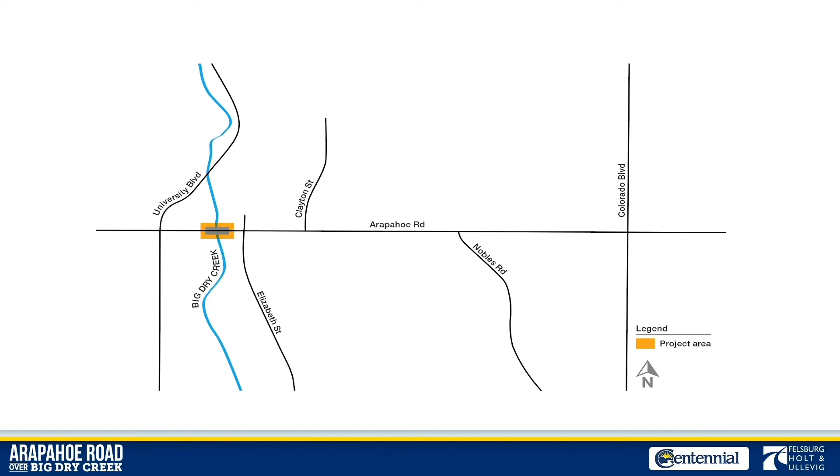This well-used bridge was built in 1945 and is located on Arapahoe Road, just east of University and west of South Elizabeth Street, and serves as a main east-west corridor to and from I-25 for the surrounding neighborhoods and businesses. The multi-use trail underneath the bridge provides access along Big Dry Creek to existing parks and other trails.

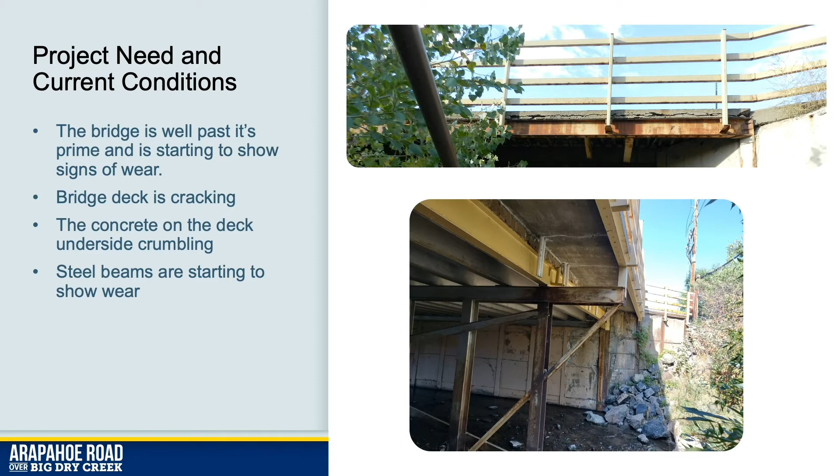This 74-year-old bridge is well past its prime and is starting to show signs of wear. As the bridge continues to age, maintenance costs will rise. Currently, the bridge deck, or the riding surface of the deck, has cracking and patched potholes, while the underside of the bridge deck is experiencing concrete spalling on the widened areas. The supporting steel beams are starting to show wear with the rusting of the steel.

Although the bridge was widened on both sides from its original design, it is still only 79 feet wide from outside to outside of each railing. Arapahoe Road is wider than this and is required to narrow down as it approaches the bridge from both directions.

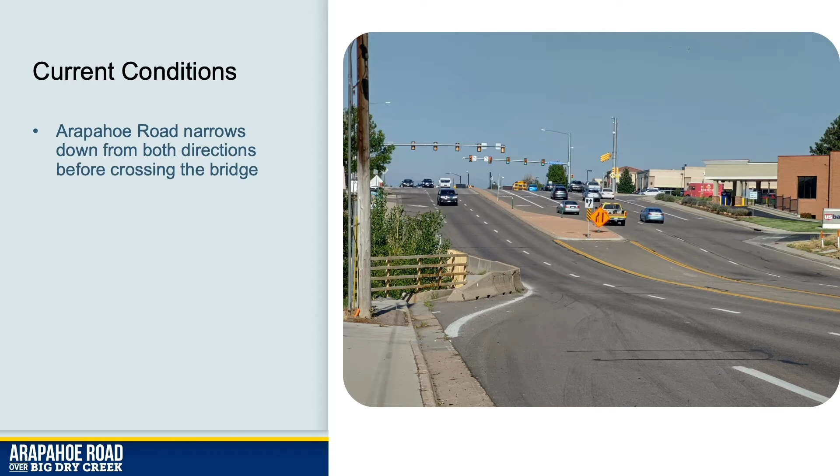As a result of the road narrowing, there are also inadequate pedestrian facilities on the bridge. This includes a sidewalk that no longer meets current needs and a set of stairs that serves as the only connection to the Big Dry Creek Trail.

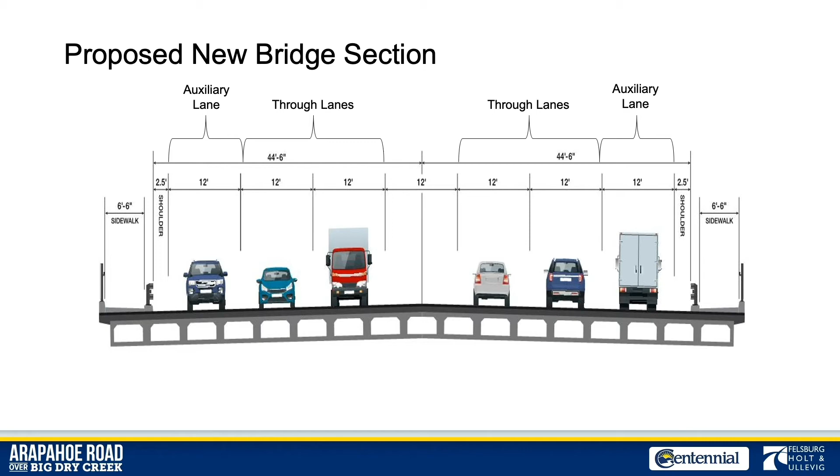The proposed new bridge will be 107 feet wide, and the design will be able to accommodate two 6.5 feet wide sidewalks, 2 through lanes in each direction, and a center turn lane. Currently, there is an existing raised median. The raised median will be shortened to allow for earlier access to the dual left-hand turn lanes for cars traveling westbound and turning south on University Boulevard.

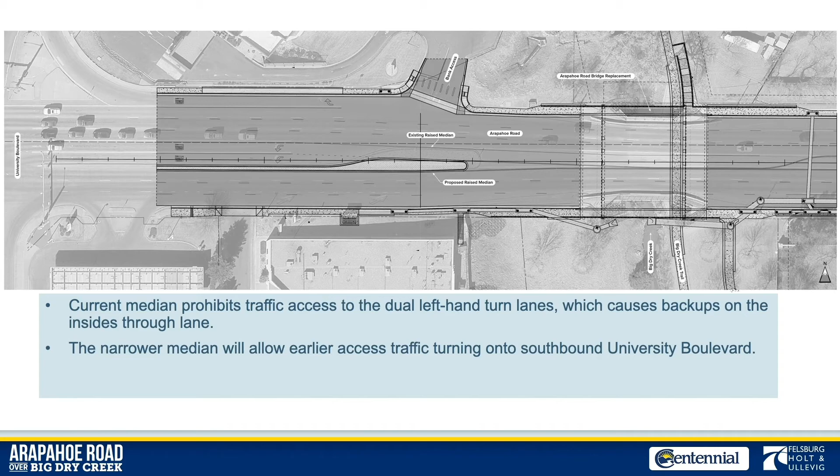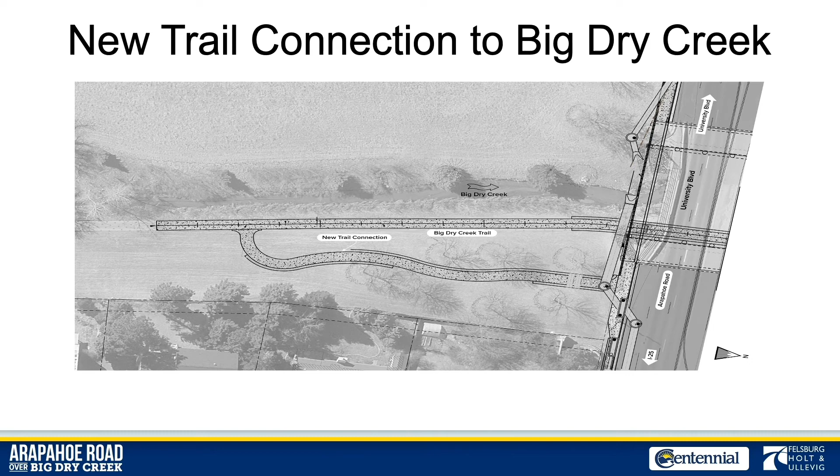The existing connection to the Big Dry Creek Trail at the bridge are stairs on the north side. When construction is complete, the stairs will remain, and the project includes a new ADA-compliant trail connection on the south side of Arapahoe Road. Pedestrians will have access to the trail on both sides of Arapahoe Road.

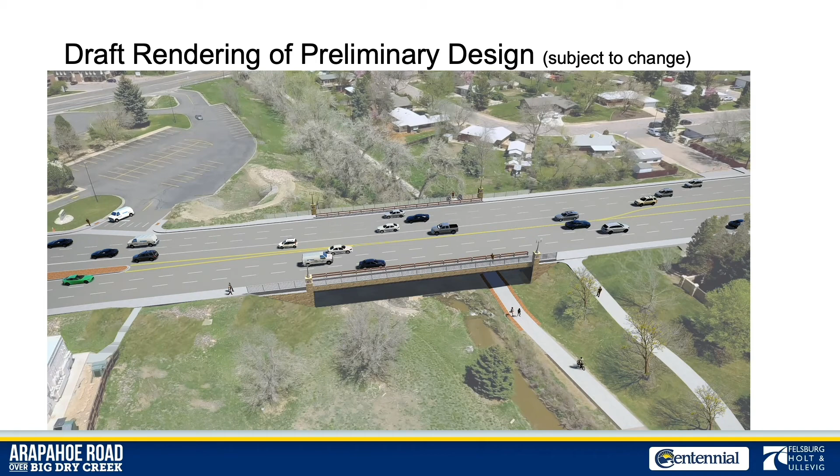The preliminary design phase is complete and the final design is in progress. The project will be advertised for construction in early 2021. Construction is expected to be completed in the spring, early summer of 2022. The proposed bridge will be phased construction.

During construction, 2 lanes each way will be provided to traffic on Arapahoe Road. Information during construction will be provided to the traveling public when they can expect possible night closures and delays. The trail under the bridge will need to be closed and pedestrians will be detoured. The detour will be well marked.